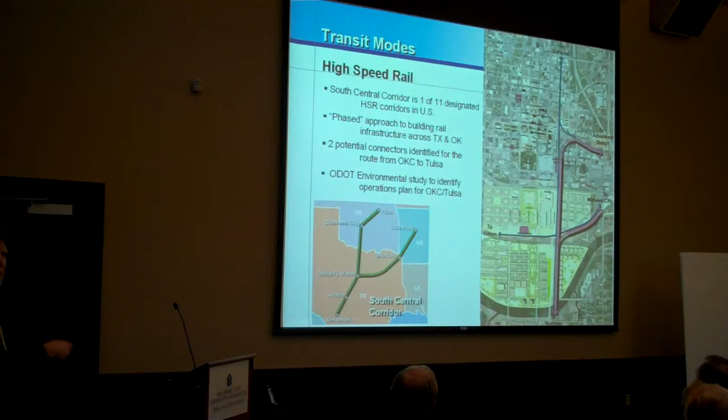We'll start looking at how that high-speed rail will work. Will it take off to Tulsa down here south of town, or can we get it to come up through the center part of town? And we'll be looking at that and how the hub will have to deal with that.

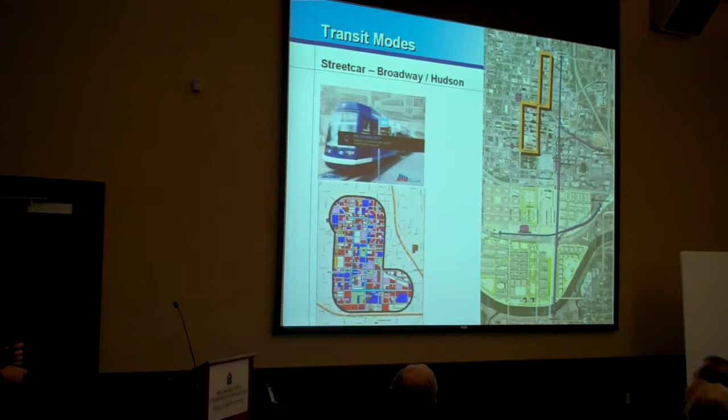A lot of you know about the streetcar, the downtown streetcar funded by MAPS and being studied by our firm, in the downtown circulator.

The Robinson-Broadway couplet and the Robinson-Hudson couplet is kind of the route that, as Rick Kane said to me one day, is percolating to the top. It's not finalized and no one has said that's the route we're going to use, that's the base we're going to build on, but it is kind of emerging from all the alternatives as, hey, this might be the way we need to head into the future.

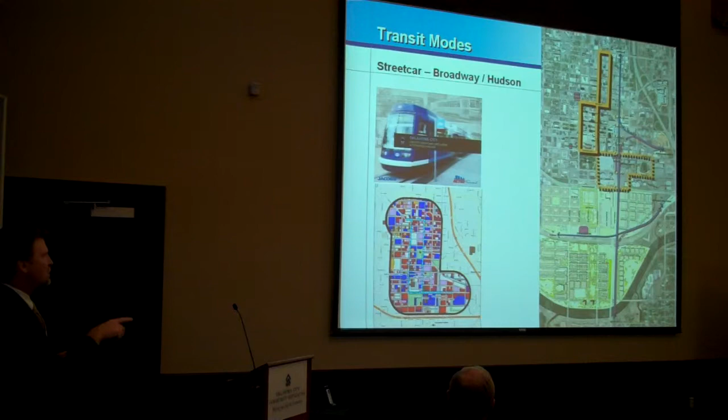Now there are some other options. The southern leg of that has a real impact on some of the hub studies that we'll talk about, and there's other northern and central legs that we'll talk about in the future, but clearly it has an impact on the hub.

And then finally, all that trains and rail and transit is important, but we also need to remember automobiles and pedestrians. People will need to get here by car, taxis, and people will want to walk to this, and we want them to walk to this.

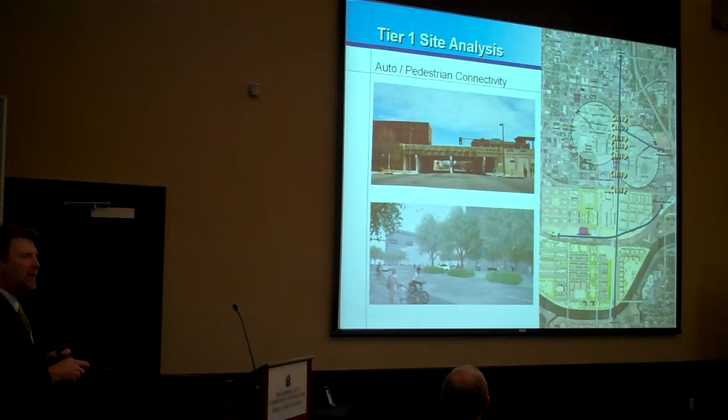So we're going to look hard at how we walk through and over and around that rail line that bisects our community, and how we can use this hub and this study to maybe think about penetrating that and opening that up and making it less of a distraction and a divider between our community.

So Allan is going to walk us through the evaluation components and matrix, and then plow through the sites, and then we'll open it up to you all.

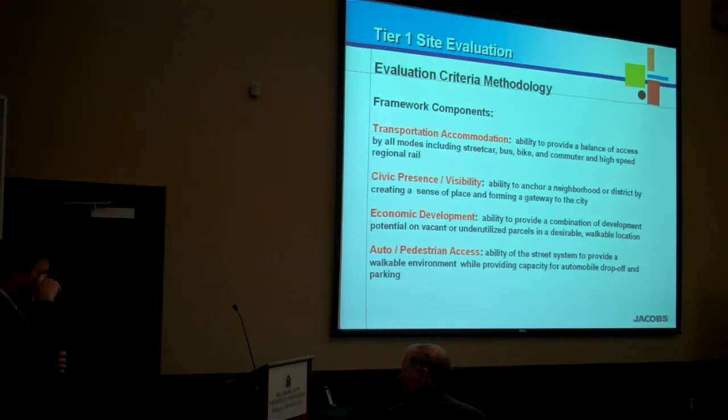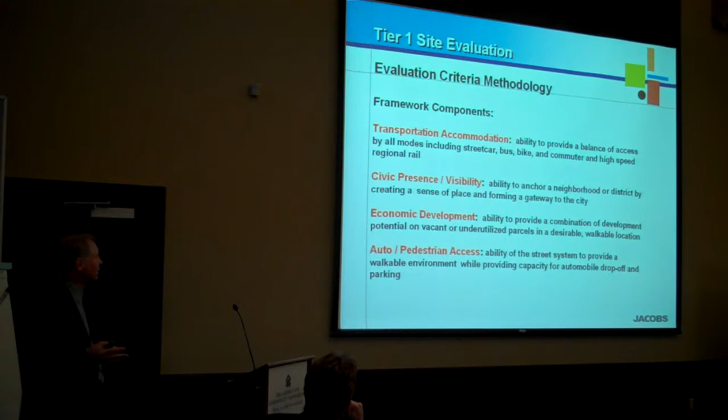When we start looking at trying to determine the best site for a facility, we try to start with setting some criteria, putting some criteria in place that gives us a way to evaluate what are some very subjective things or qualitative measures and make it a little bit more quantitative. So it's really a tool, although it's not scientific, that helps us do that.

For this project, we've identified at this level what we're calling the Tier 1 analysis, where we're trying to go from a large group of sites down to a smaller group that we want to get your input on. We're looking at 4 basic areas.

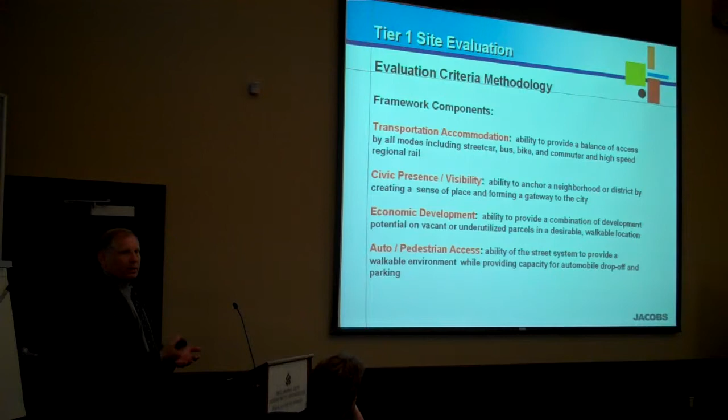The first one, in red, is transportation accommodation. That's basically, can we accommodate the transit program? Can we get all the transit modes into this location? So that's the first one. And can we balance that in terms of being able to provide the connectivity between all of them?

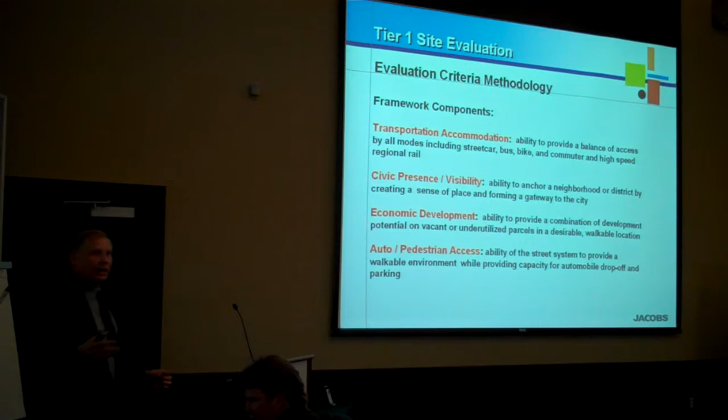The other one is, does the site allow us to create a civic presence? Is it visible? Is it going to be in a location that is highly visible, but also give you the opportunity to create a civic entrance and a gateway to the building, to the city and the region itself?

We also look for sites that can accommodate economic development in terms of having some development potential, either in terms of having vacant property available or underutilized parcels, surface parking lots that can be changed to either buildings, parking, and so forth. And it's also in a desirable, walkable location that works with all the other uses in the area.

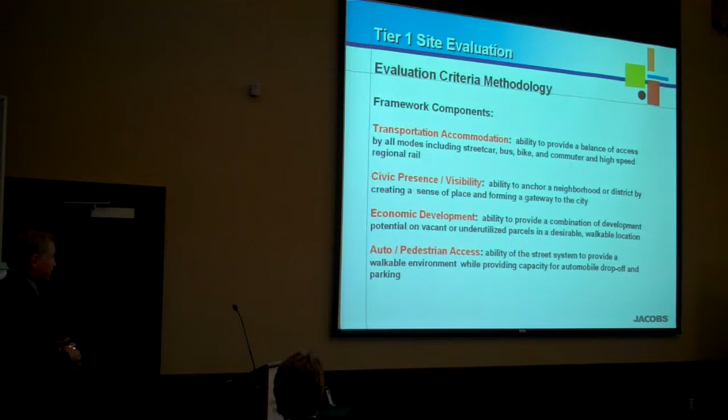And it also relates to access. We have to be able to get automobiles there. There will be some level of parking requirement, although we usually try not to focus too much on parking because it is a transit facility. We don't want everybody driving here. We want people to use transit.

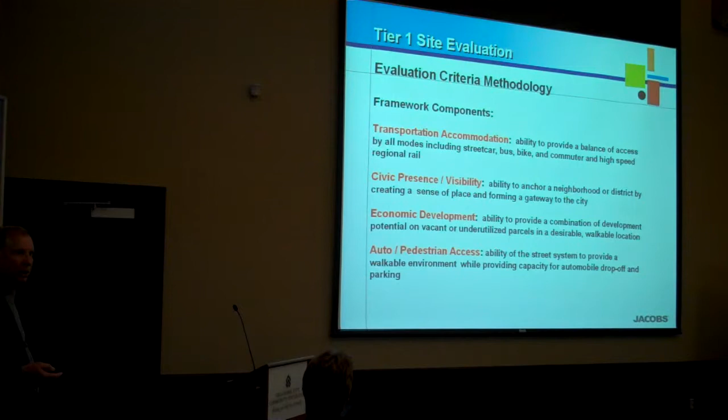So more importantly is the pedestrian access, making sure that it's well connected, as we talked earlier, from having a street grid that is very conducive to pedestrian activity that you're already doing with the Project 180 plan, but making sure that it integrates well with that plan.

So if we keep those 4 things in mind, we then use each of those, what we called framework components, and we evaluate each one.

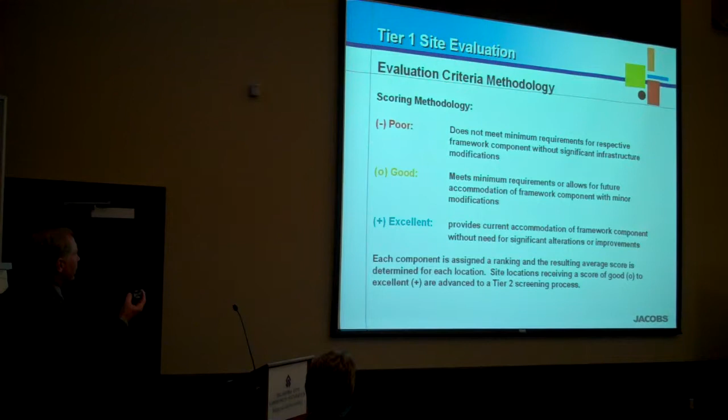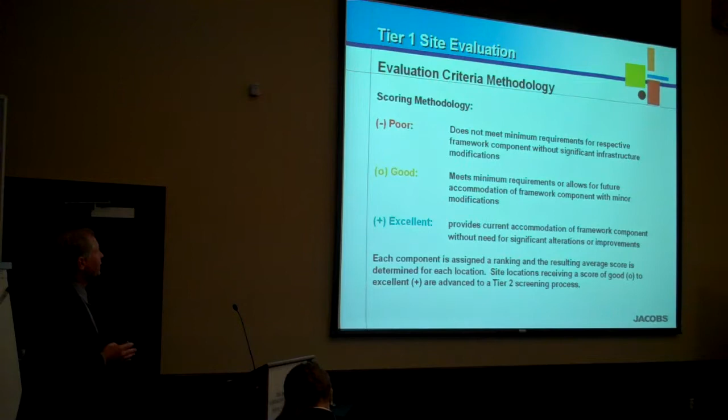Keeping it at a pretty high level, we look at whether it's a poor accommodation in terms of, does it meet the minimum? There are also fatal flaws, and some of those have already been flushed out, but in terms of looking at the sites we'll be talking about in a minute, does it meet the minimum requirements in terms of providing accommodation without having to have big infrastructure changes to make it work?

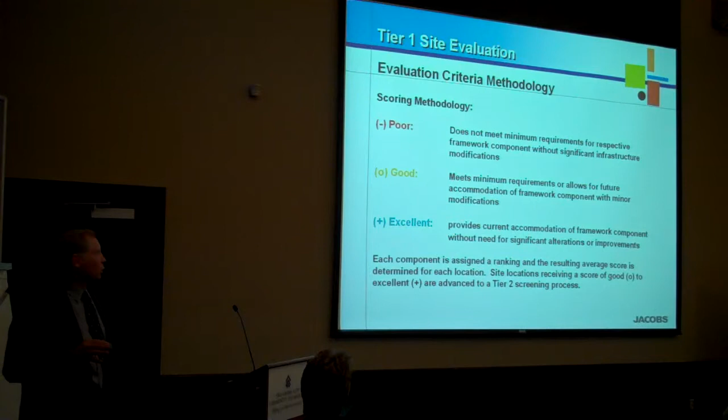The next one is, does it meet the minimum requirements? Will it allow for future accommodation of all those framework components? And then we go to excellent. That means everything is basically there to let it happen now. We don't have to make any major structural changes to accommodate that site.

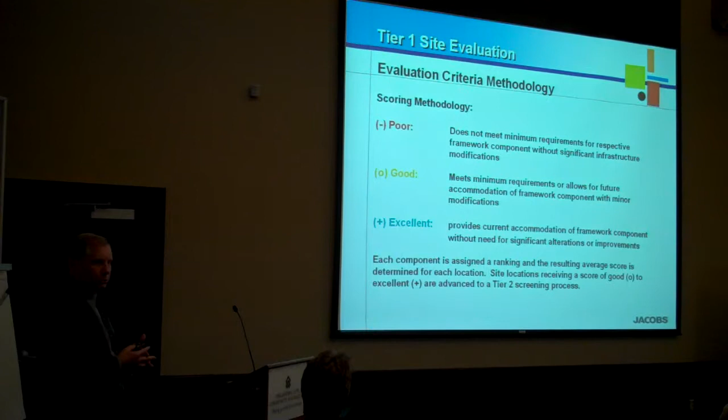These were basically put together by working with the steering committee or the advisory committee and basically just sticking some dots on the map saying, let's look at this one, let's look at this one, this might work. Some were ruled out pretty quickly because they were too far away or they weren't along the rail corridor.

Maybe we missed some, maybe there's some that just ought to come off that we're considering. But what we're trying to do is rank these and bring it down to 2 or 3 sites that we can take to what we call Tier 2.

Once we get to Tier 2, we will go to a higher level of detail where we'll actually start to lay these sites out to make sure that everything fits, that we can get auto access, that parking fits, that we've got space to accommodate the rail platforms, space to accommodate ticketing, back of house areas, maintenance, and so forth.

That all those things really work, and then we'll test those sites.

We can't go through the process of doing that on all 10, and there's no reason to, because some of them will drop out during this process.

So what we're looking for is your input into that process, and we've gone through it with the steering committee. We've got some preliminary recommendations. We want to make sure that you're agreeing with those recommendations.

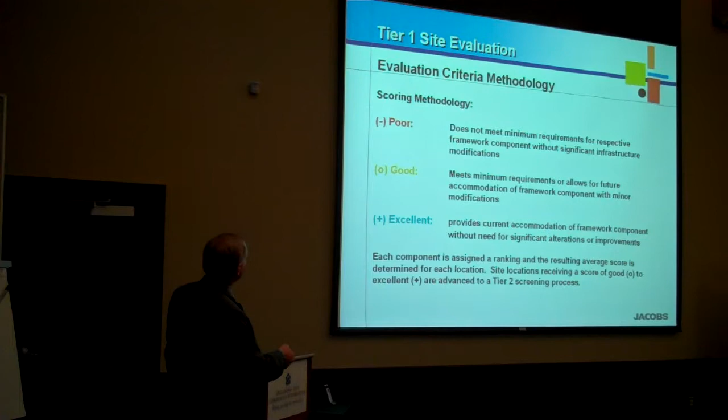And if we go back again, think of the color codes: poor being red, good being yellow, excellent being blue. So you can kind of get a sense graphically of how these fall out.

If you start to see a lot of red, you know this site is not a good site. The more blue, the better.

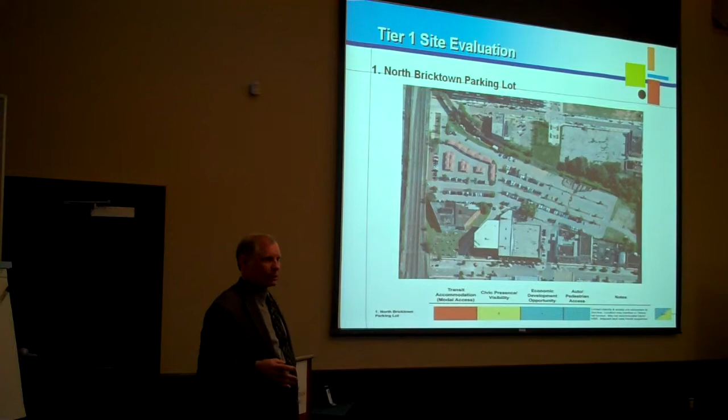So for transit accommodation, we ranked it fairly low, and I won't go through all these in detail, but the reason it's ranked low is it's fairly far north of the existing facility, which is the Santa Fe Depot, where the existing Amtrak platform is.

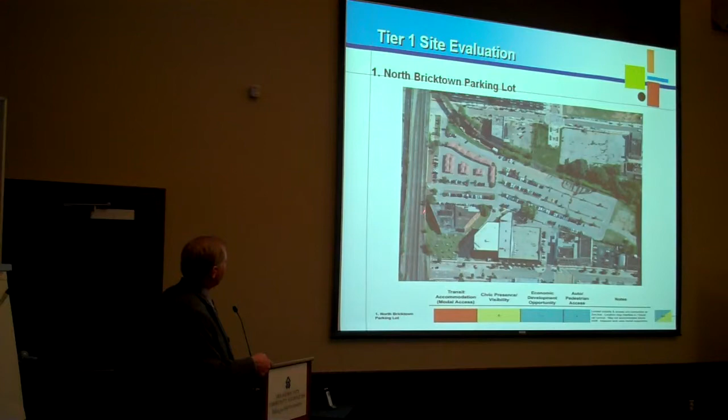Another element is that if high-speed rail or commuter rail were to connect to the Adventure District, that line would basically cut through this parking lot and join this right-of-way. So it starts to get bifurcated, if you will, by that corridor in the future.

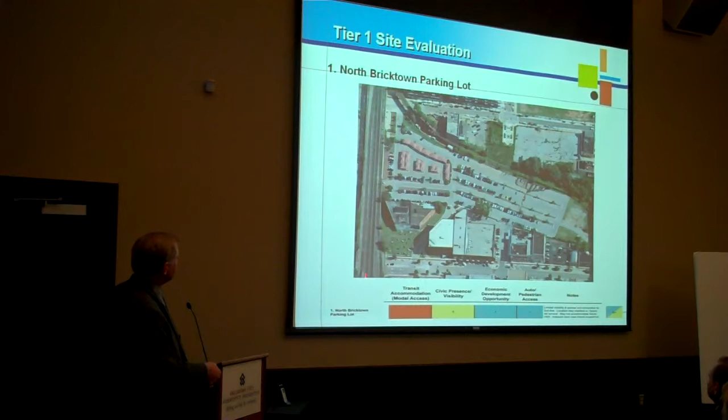Meaning the platform could not be along a curve, it would have to be further down this direction. So we felt like there were some challenges here on the transit accommodation.

Civic presence, ranked neutral. The problem we have with this one is really visibility. It's pretty much buried behind some other buildings, and it's across this rail line.

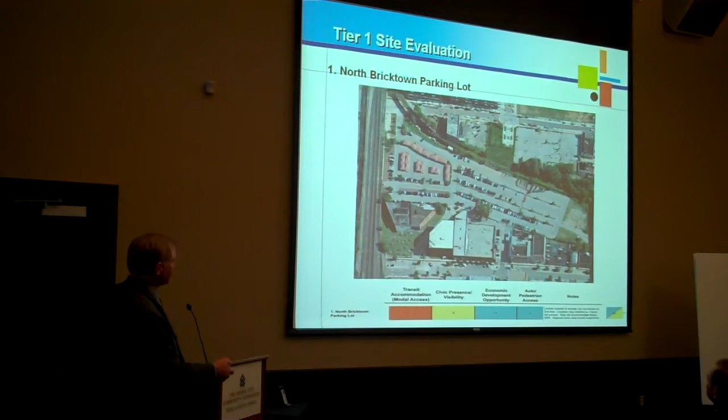If we jumped across the rail line and could bridge over it and get some frontage on 2nd Street, it might get better. So we talked about that. This one more or less comes out fairly neutral in the end.

The next site is immediately adjacent to that. This is where the buffalo statues are. Pretty much ranked the same way.

It's got a little better civic presence maybe because it fronts now on 2nd Street or Main Street, but it has the same general issues in terms of transit accommodation of possibly being split by this line going to the Adventure District, or high-speed rail comes through here and continues to Tulsa through this site.

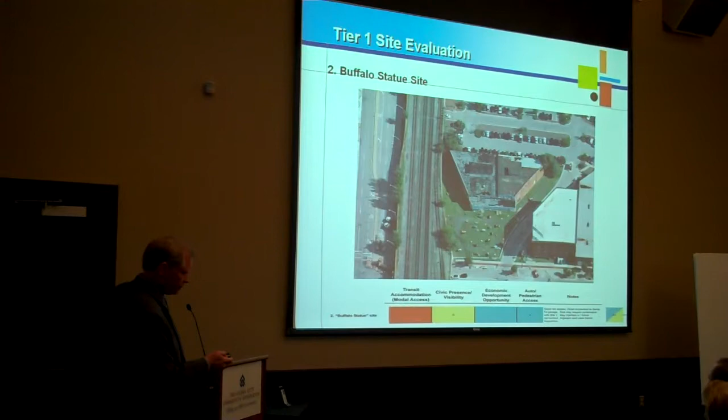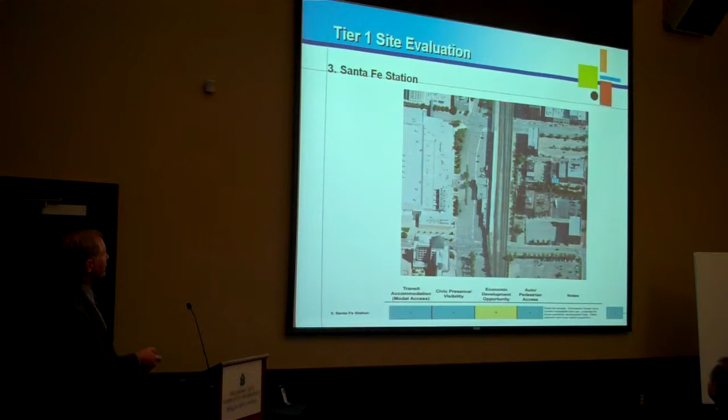Because here we have a wider right-of-way, elevated guideway, if you will, that accommodates the Amtrak platform, could accommodate commuter rail, still allow some freight bypass. We probably don't have to rebuild the entire area if we locate a station here.

Now the question would be, is the Santa Fe Depot itself big enough to accommodate all the other needs? But it has great civic presence.

Economic development opportunity ranked medium, primarily because the Cox Center is right across the street. It essentially turns its back on this location. However, we are closely watching what's going to happen with the Cox Center in terms of maybe potential redevelopment.

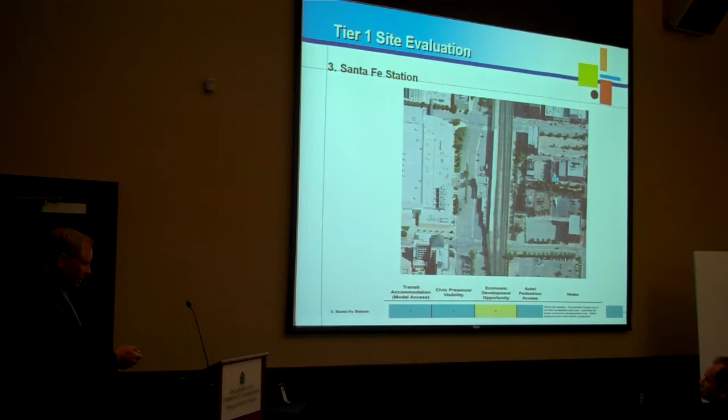And as you get a new convention center, what happens with this site? That's something we want input on and are looking to continue to work with the city as that process moves forward as well. It also has very good connectivity to Bricktown.

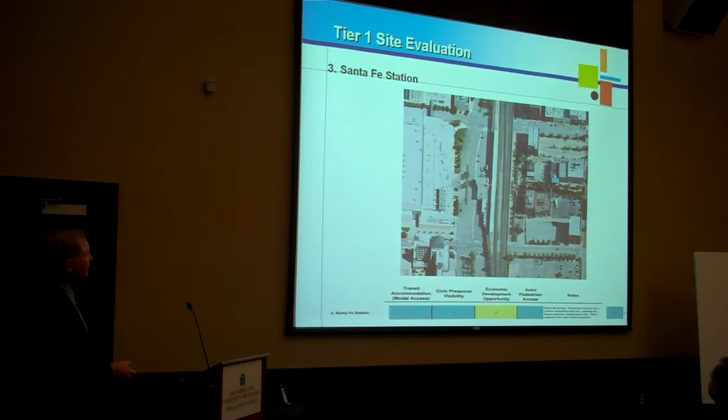The old tunnel that connected to the passenger platforms could actually penetrate through the wall on this side and connect this facility into Bricktown. So this will rank fairly high -- it comes out as a blue in the end.